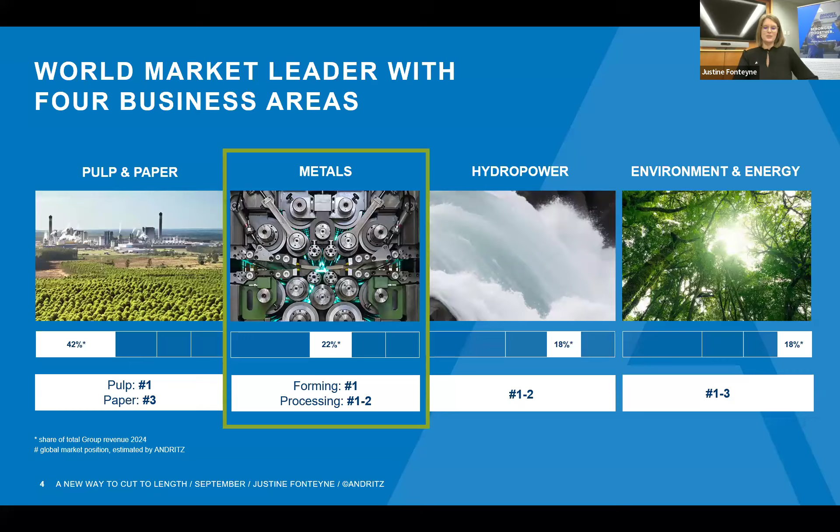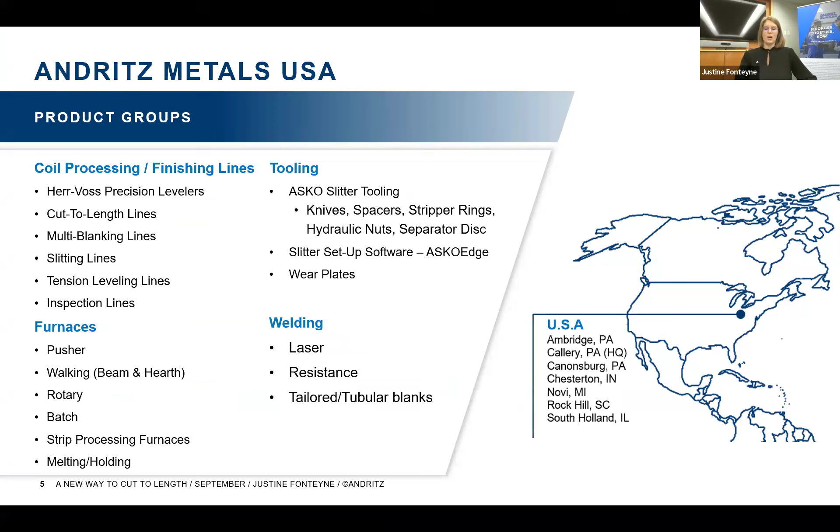So we are situated now in the ANDRITZ Metals division, and with Schuler, we are completing the US team of ANDRITZ Metals, which provides reliable services for coil processing, finishing lines, furnaces, tooling, welding, but also services like spare parts, customer service, and other services like reconditioning or training for several types of equipment.

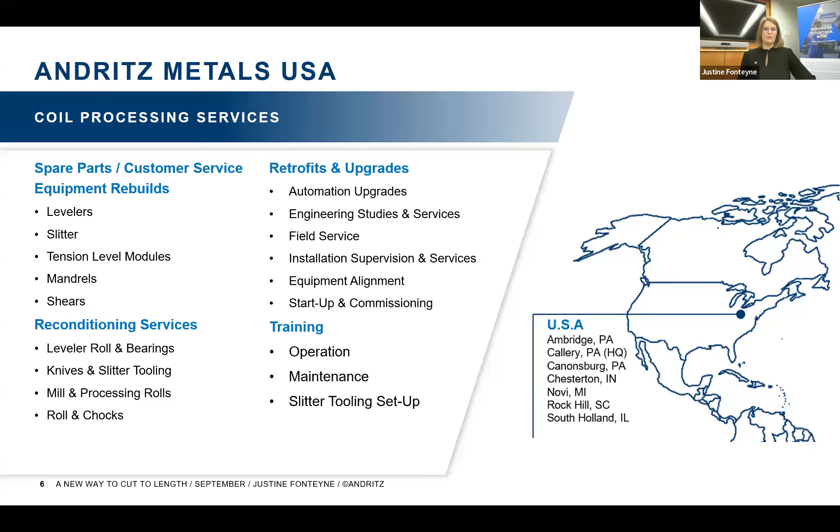By integrating Schuler, ANDRITZ now has the opportunity to provide equipment and solutions for the whole product cycle, starting from steel manufacturing up to the finished parts. And as ANDRITZ Schuler, we are more located in this end process. Today we are talking about the blanking technology.

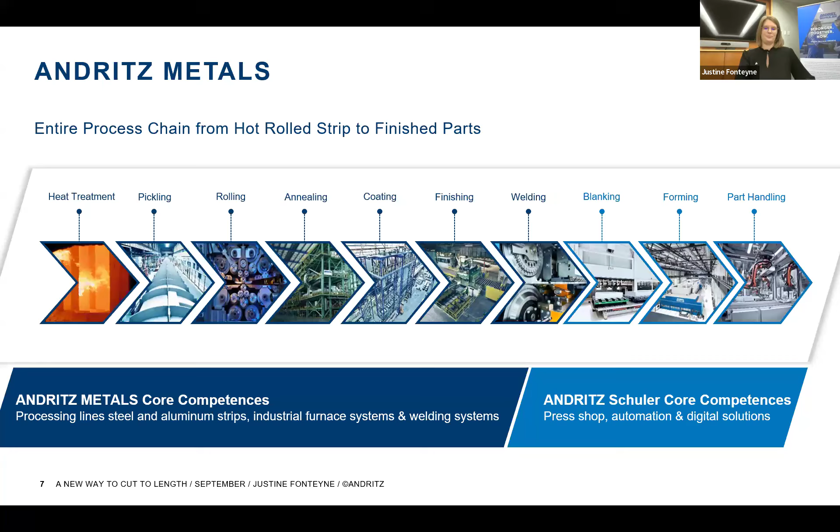ANDRITZ Schuler has more than 50 years of experience with laser technology, and with that heritage, we have the possibility to answer the demands of the market. In the last years, we saw an increasing rise of variants, smaller batches, smaller product cycles of vehicles, and also a trend towards lightweight construction, which brings various materials into the game, and also a lot of product-specific parts.

To answer that request, we developed a high-performance laser blanking line a couple of years ago that is not only producing high performance, comparable to a conventional blanking line, but also completely die-free. So everything related to dies can be eliminated, and also product-specific tooling can be eliminated so that product changes can be much faster, and therefore you achieve much more productivity of your actual line.

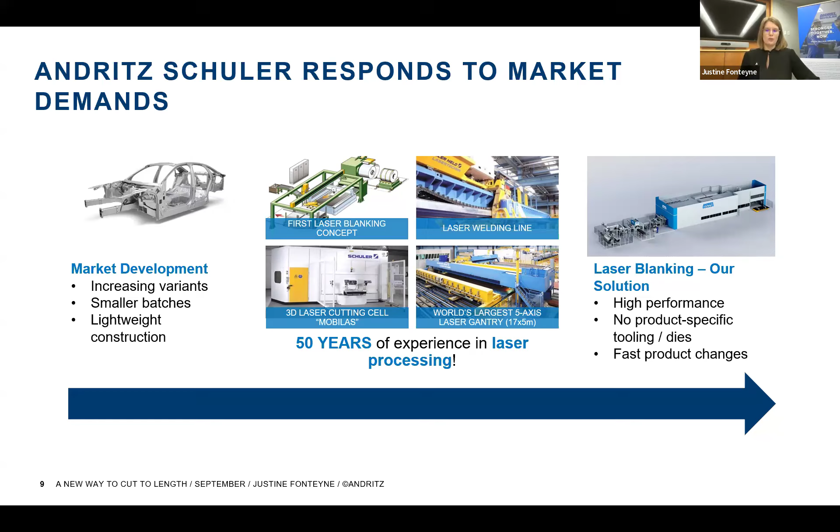And now we jump right into the topic. Schuler, or ANDRITZ Schuler, is coming from a blanking heritage, so we have years of experience with outer body panels mainly, and that's also where we started with our laser blanking developments. The first laser blanking lines were introduced as an alternative to blanking lines with press, and they are really dedicated to exposed materials and also very sensitive materials like aluminum, for example.

Today, I would like to talk about the LBL 1.18 DFT. This technology is dedicated to cut-to-length lines, or as an alternative to cut-to-length, but also for small batches of structural parts, including a high accuracy package to cover also the high accuracies, for example, for hot forming.

This line is also capable of processing thicker materials up to 6 millimeters, and is suitable mainly for unexposed parts, but also for exposed parts.

Before we go deeper into that topic, I'd like to mention our LBL 1.18 stop-to-cut solution. Whenever we face limits with our DynamicFlow technology, for example in terms of very high accuracies, this would be a nice option. It's also designed for smaller batches and can handle material thicknesses up to 12 millimeters. The key is that we design our lines dedicated to the parts you want to process, and come up with the best solution for your business.

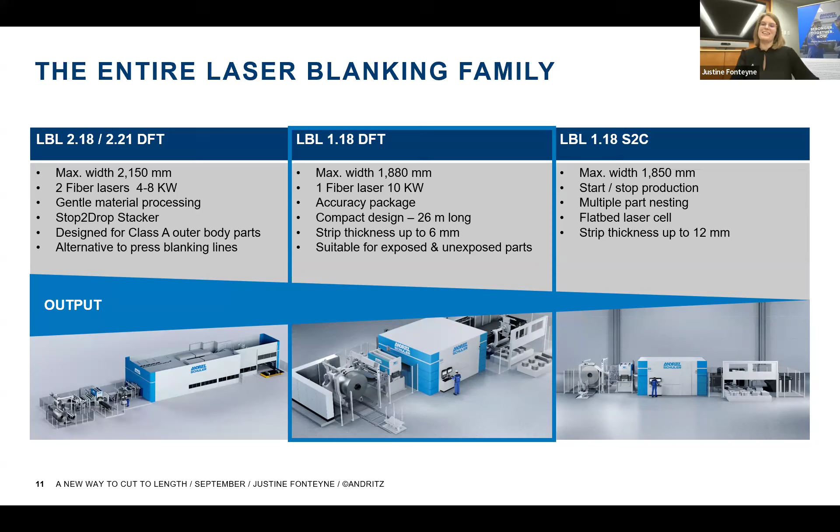Let's jump into the new way to cut to length. The 1.18 LBL DFT is not only a reduced version of the 2 laser head system, even though it comes with 1 laser. Our concept is to replace the shear with the laser.

That way you're able to do not only cross cuts like straight cuts or trapezoids, but also intelligent cross cuts like an S shape, or even unique shapes, as you can see here on the picture. You also see some cutouts, which is also a possibility you can add to your process, and that's a big plus compared to a conventional shear line.

The geometries can be flexibly adapted so that you can increase your material utilization. I have a couple of really good examples for that later for you.

For now, I'd like to show you that this line is a very compact solution in terms of space. It's about 50% smaller than conventional cut-to-length lines or conventional press blanking lines, and it runs completely continuously. So we do not need any loop pit or other big civil work for the installation.

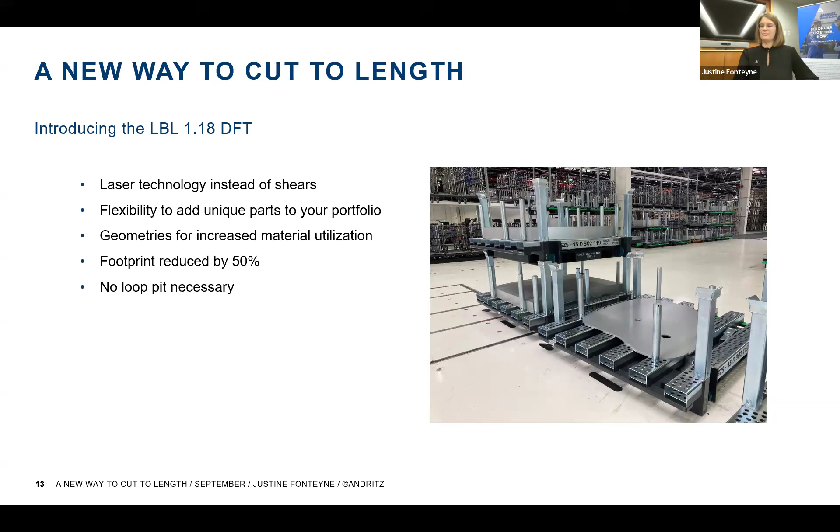Talking about the overall layout: as a normal cut-to-length line, it also comes with an uncoiler, a cutting area, and a stacking area. But what's very specific here is that we take the coil and go directly into the leveler. There's no in-feed unit in between.

Then we use the leveler to go into the laser cell, so that way we can reduce not only the loop equipment, but also the feeder technology. Our levelers are cassette designs, meaning you can use different types of cassettes for specific materials.

For example, for aluminum or steel, but also different thicknesses. If you have thinner material, you can use a different cassette than with thicker materials. With this cassette system, you have flexibility, and we can also add an automated cassette exchanger so that you don't need to do all of this manually.

Once the material goes through the leveler, it's pushed into the laser cell. Here we're cutting with one laser head in dynamic flow, meaning we won't stop the line. The material flows constantly at the same speed through the line.

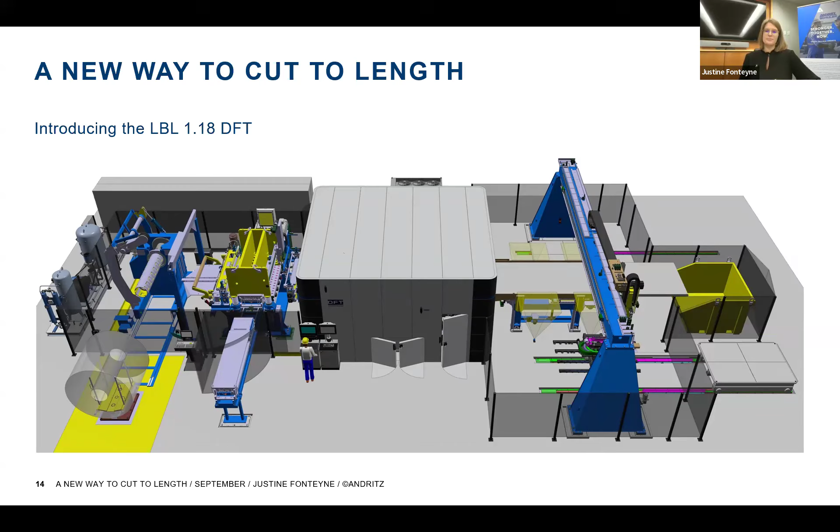And this is how it looks in production. You can see here the belts moving the strip material forward in a continuous way. You see the laser gantry with the laser head moving back and forth to cut the geometries.

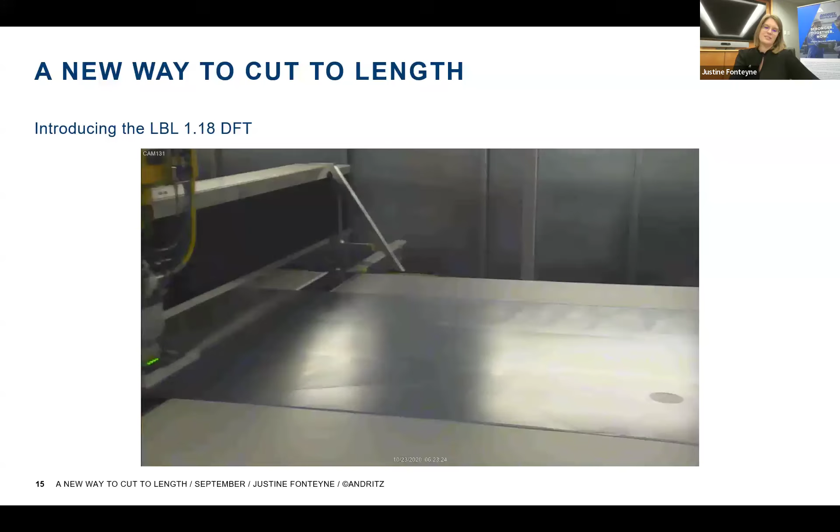Underneath, you can see that we are using shafts to make a little gap for the laser cutting, but also we are able to open those shafts to eliminate smaller scrap parts directly in the laser cell. This ensures a reliable process without having the risk of little small parts jumping around or getting stuck underneath or something like this.

What I also wanted to show is that we have a very closed design, so that means we do not have laser dust all over the place. We have dust exhaustion, a fume system where all the dust is collected and filtered so that there's no harm for people and equipment.

Our laser blanking line runs in dynamic flow, so that is what we tag the continuous cutting. Our line can be equipped with a 4-high leveler or a high precision leveler with 6 levels with support rolls.

We can integrate up to 10 kilowatt lasers, so depending on the thickness of your material, we define which one makes the most sense, starting at 4. And as I mentioned before, we have either the feeder as a single solution, or we add another one to make it a double feeder.

We can cover coils with a maximum width of 74 inches, and the maximum thickness would be 0.23 inches.

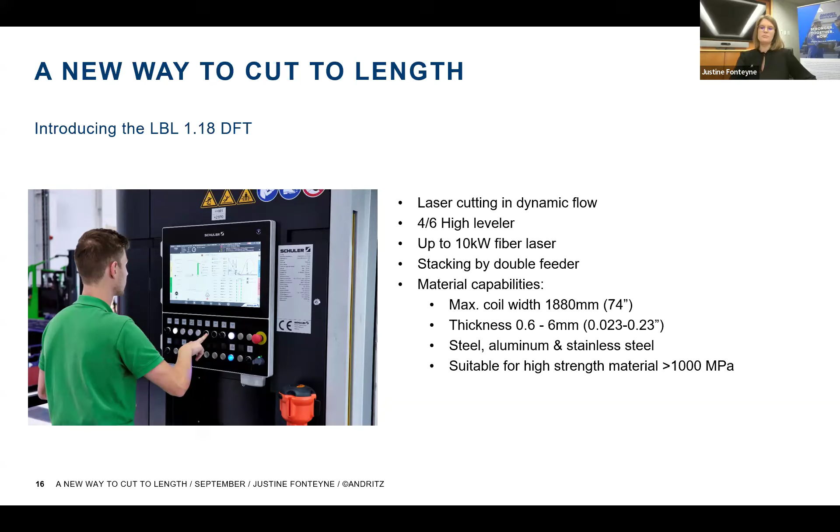With our systems, we are able to cut up to 45 parts per minute. So we are talking about cross cuts here, and also parts that can be stacked with 2 parts at a time with a double feeder.

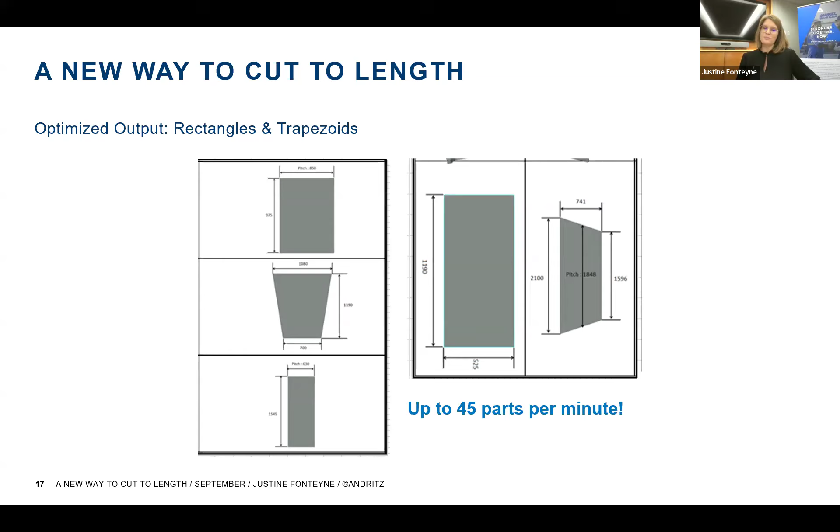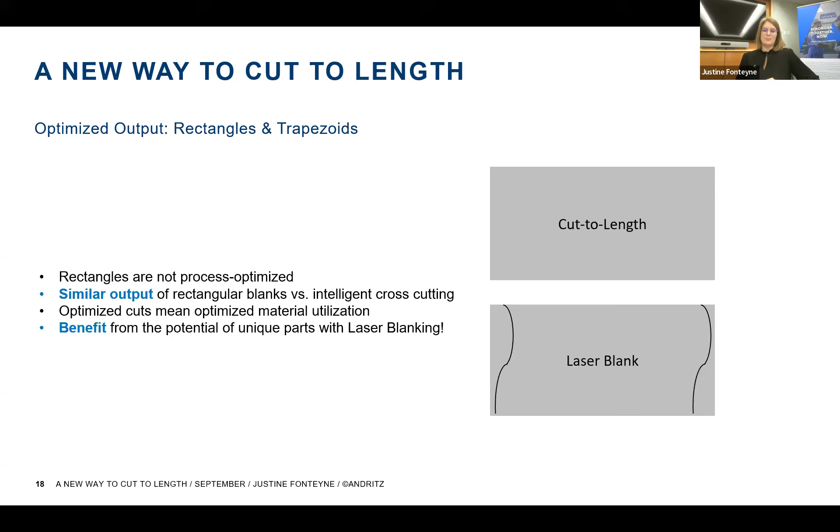But most of the time, the rectangular blanks are not really the blanks you want to have, but they're easy to get. And what we are promoting here with our intelligent cross cutting is that you're getting closer to the actual shape you would like to have, save material, and use the same output. I have some examples here to get you a bit into the topic.

So here you can see an example for straight cuts or trapezoids that would normally be run on a cut to length line directly from the coil. The first one is the hood. You can imagine cutting out a hood out of a rectangular blank where you would have the yellow areas as scrap. What we propose now with our laser blanking solution is that you can modify the straight cut into an omega shaped cut so that you can do an edge to edge nesting of the actual blank you want, this hood, and save 13% of material.

Those of you that are familiar with oscillating shears already know that you can get much more material savings from the oscillating movement. But here, looking at the second example with the fender, you see that you can save even more if we are talking about an S shape, also cut edge to edge, so that you can use the yellow areas that would be scrap if you used trapezoids instead of this intelligent blank.

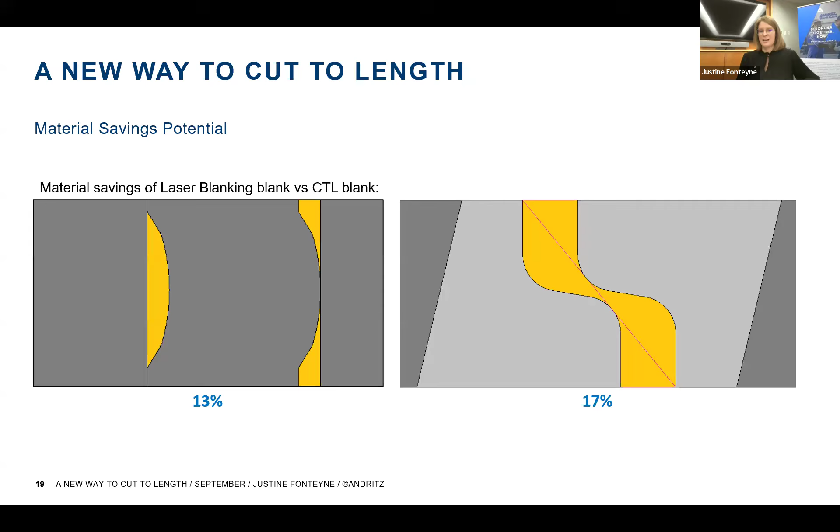Another example would be intelligent master blanks. We regularly see that rectangular blanks are used in flatbed laser processes afterwards to cut the actual part. What we have here as an example is that you are not using the full rectangular blank, but a multiple nesting of the parts you want to get and make an intelligent crosscut here. That means you would not have a rectangular blank, but this gray area as a new blank to introduce to your flatbed laser. Then you could, same with the rectangular blank, cut out 4 of those parts, but you can also use the corners for the previous intelligent blank or the next. So you could save 12% of material.

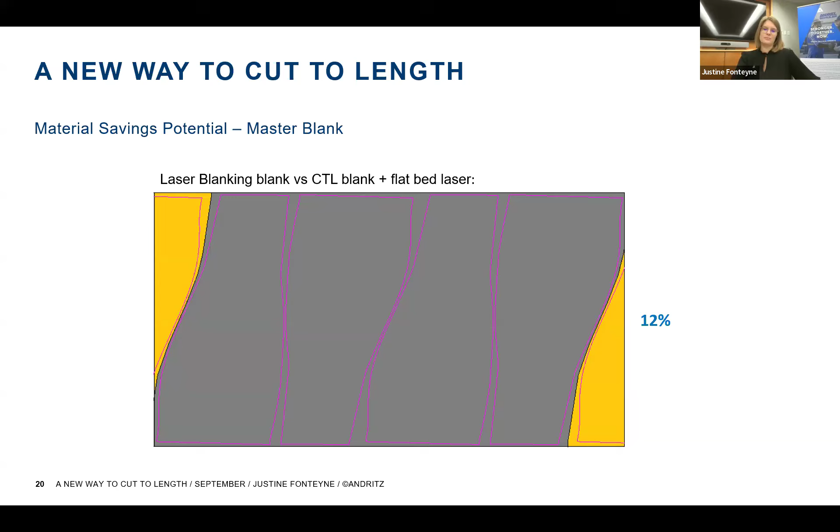And what comes on top with that solution is that we can use a second laser head on our gantry to make it a 2 laser head system.

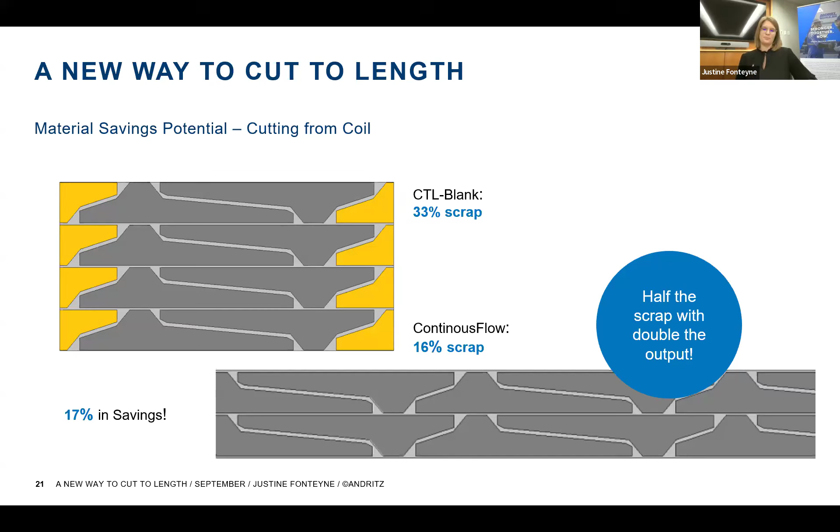Talking about output, I already mentioned that we can achieve 45 parts per minute. This is based on one laser head, and this is also our standard. The 45 parts per minute are valid for smaller feed lengths, where the feeder can pick 2 at a time. Otherwise, the feeder limits the output at 22, as you can see on the very first examples. When the feed length or thickness gets higher, you see a little less output.

This solution enables us not only to do straight cuts or cross cuts, but also cuts in length. It might be interesting to cut smaller rectangular blanks from a bigger coil to avoid one slitting step, which could be useful for smaller batches, or if you want to use only one kind of coil variety.

The next example shows how you can include cutouts, but here you can see the output immediately drops to 15 because of that cutout. So it is possible to integrate them, but we always recommend having the cross cuts as the main jobs for your line and only adding parts with unique features or cutouts in the product mix on a smaller scale.

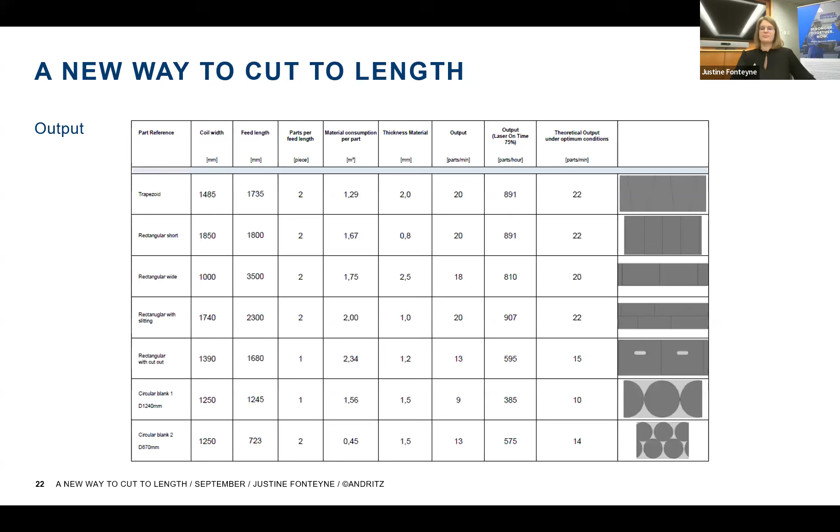The next point would be the footprint. I already mentioned that we are at approximately 50% of the actual size of a conventional cut-to-length line. Here you can also see that we save a lot of work in terms of the loop pit. In the picture below, you see a conventional cut-to-length line with a big loop pit to disconnect the continuous coil feeding from the start-stop motion of the shear, which would be the same for a conventional press blanking line.

At the end, you see some little holes for the lifting devices of the stacker, which can be eliminated with our feeder solution. On top, you see our laser blanking line 1.18 DFT, where there's only one little area in the foundation to actually lift the coil, but other than that, everything is mounted completely on floor. The full size is 26 meters in that standard version, while a full cut-to-length line would be 48 meters. So it's not really 50%, but we are very close to that.

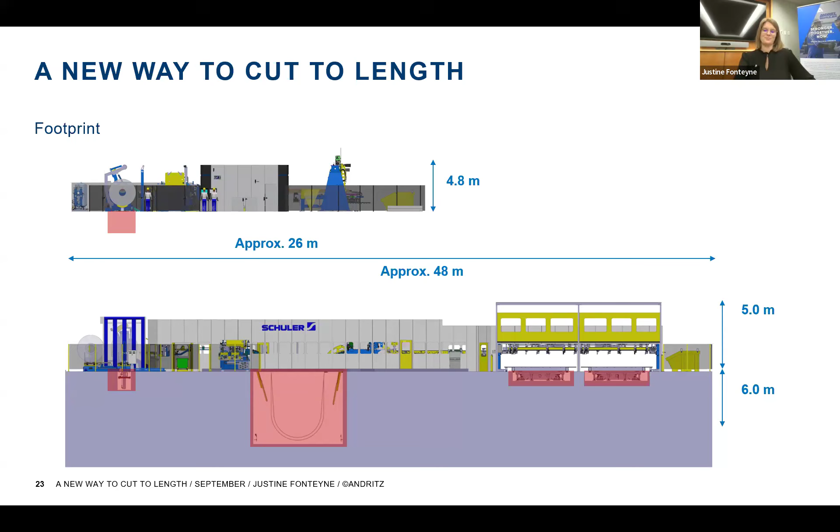And this is how it looks in real. On the left side, you can see the on-floor setup of the installation. We just have those foundation plates. In this special case, we also have connections to a scrap conveyor system, which is the little fences in the back.

Other than that, we also need very little trenches, as everything is mounted on platforms, as you can see in the second picture. We basically just have the in-feed point from the customer, and then one trench in the floor going into our platforms, and from there everything is distributed into the line. All the cabling and piping is also on floor in those pipelines, in these platforms.

You can see also that we use the cabinets as fences. We really thought about making this the most compact possible design to fit into even the smallest corner of your facility. All of our lines are pre-assembled, so we do a pre-assembly in our facility first to make sure everything is up and running, then we have a pre-acceptance test by our customer before shipping, and then we do the installation and commissioning on site.

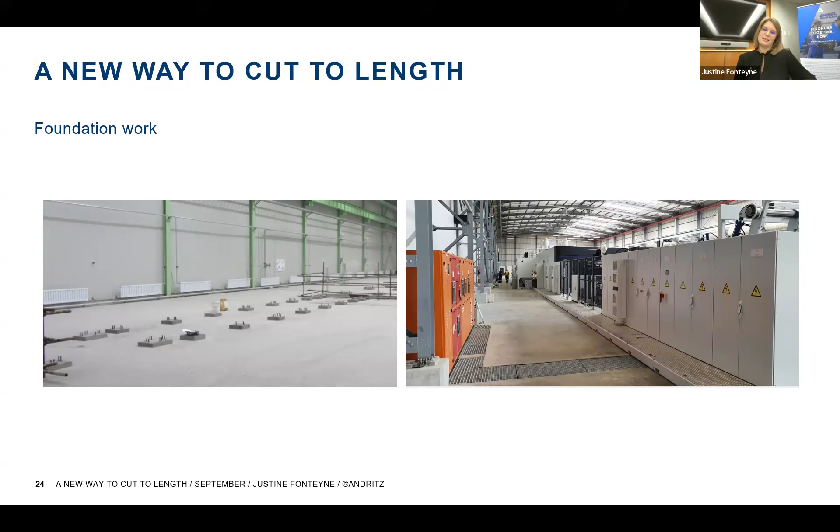To end the technology portion, I would like to highlight two options. The first would be the Class A package, which comes with an additional in-feed unit with cropping shear and also brush cleaning devices for the belts and the blanks.

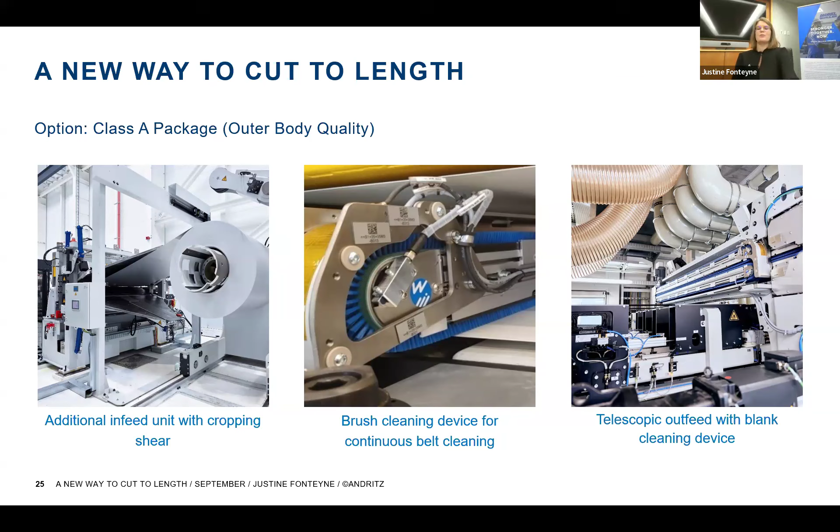The second option I'd like to highlight is part marking. This is done with a separate laser installed in our laser cell, but it is not linked to the cutting process. It's an extra laser doing the marking so that you have traceability of your parts, and in the long term, if you're interested, you can also add this to a track and trace system.

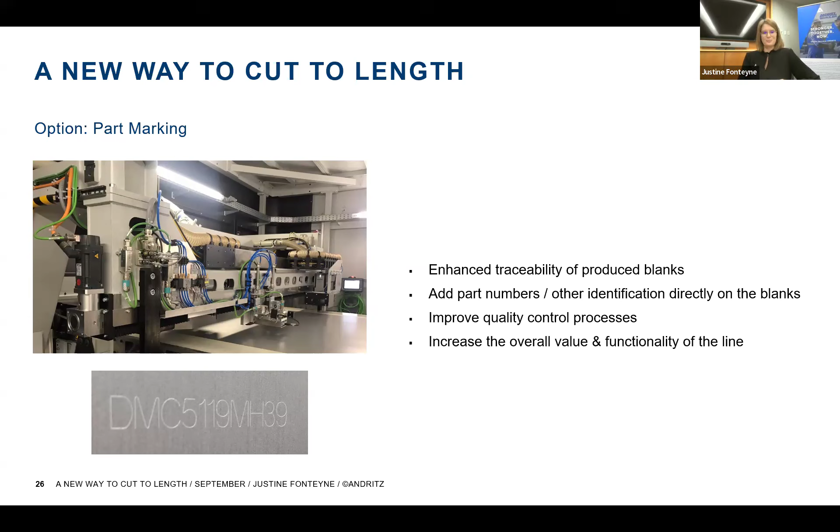So to summarize, the LBL 1.18 DFT is a compact entry into our laser blanking technology. It's a proven system, and we also have local service for that. In that kind of blanking line, we use the laser instead of shears or oscillating shears. This enables the customer to not only do cross cuts, but also any kind of shape, also with cutouts. That way you can increase your material utilization. We saw 3 examples with very high potentials, more than 10%. So it's definitely worth looking at.

I'm pointing that out so much because we have several customers that were already able to calculate their return on investment based on material savings. And then we have this compact design, which is a very big benefit in terms of floor space, and also that you do not need any foundation work like a loop pit - that's a big plus, as you can put the line pretty much anywhere. So we have customers that are using former coil storage places, for example, or second floors.

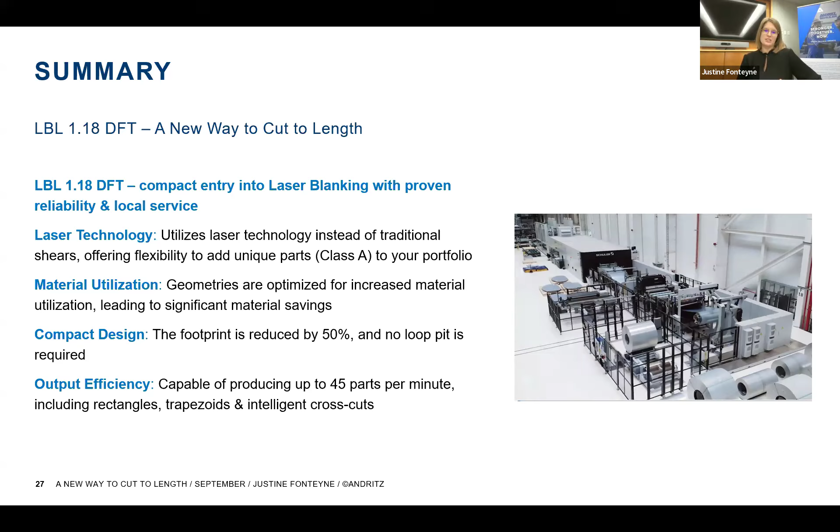Support service: we have several lines installed in North America, and therefore we established also a very powerful service infrastructure with several facilities in North America - Canada, US, and also Mexico. This team can support with launch assistance, troubleshooting right away, spare parts, and they are backed up by our product specialists from Germany that have always remote access also to your lines.

On top of that, we are dedicating always a local project manager during the installation phase. So that means you have always one point of contact in your time zone that is taking care of all your issues or requests. We also know from a couple of our customers that are cooperating on backup solutions with their laser blanking line solutions. So if you choose to go with laser blanking, you're definitely not alone. We are there to make a smooth transition towards laser blanking.

References: we have 24 laser blanking lines sold worldwide so far. It all started in 2012 with our first prototype. And since 2014, we are providing equipment for a big OEM that is using them for serial production of their cars as well.

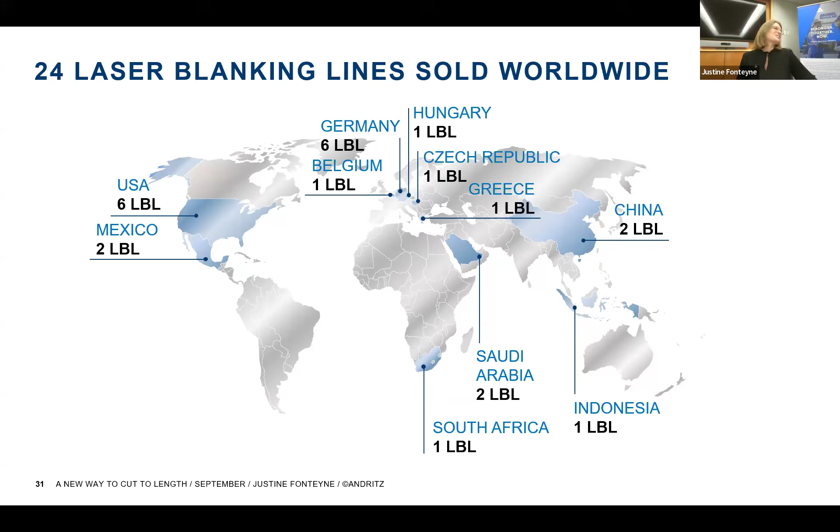At this point, I'm very happy to introduce our guest, Christopher Christock, Technology Director at BWD Technologies. Chris has 34 years of steelmaking, finishing, and coating experience, and 11 years of metal processing experience, including laser applications. BWD Technologies runs the first laser blanking line in the US and is currently setting up the second one. So we are very happy to have you here, Chris. Welcome, and looking forward to your insights of operating laser blanking lines.

Well, thank you, Justine, for that introduction. I want to say that BWD Technologies is honored to participate in this webinar by providing a summary of actual experience with the laser blanking equipment provided by ANDRITZ Schuler and our laser blanking process that it enables.

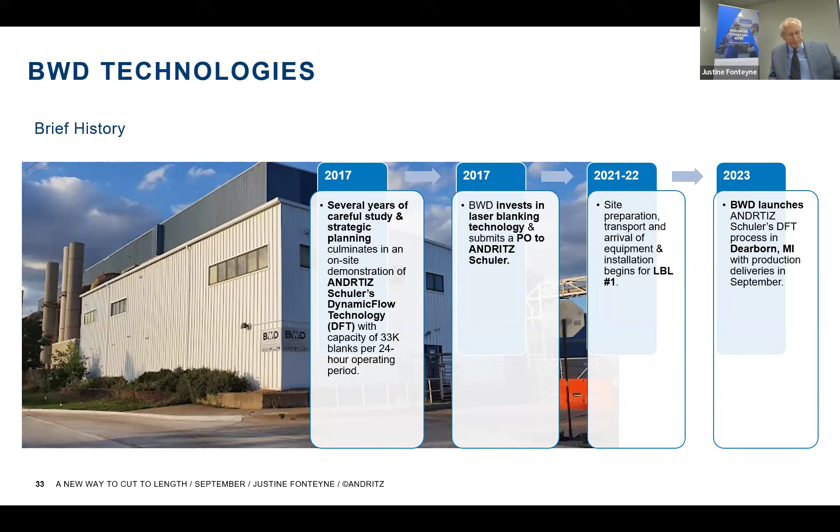It's difficult to pinpoint the single most important factor establishing the need for laser blanking, but I believe the significant market change brought about by the drive to implement electric vehicles was a major factor, as the data shows a significant increase in rate of startup automotive companies and commensurate increase in new model launch plans correlating to EV manufacturing. These new startup manufacturing facilities were geographically located in new regions, and each held a market share that created intense focus on cost savings and flexibility of the manufacturing process.

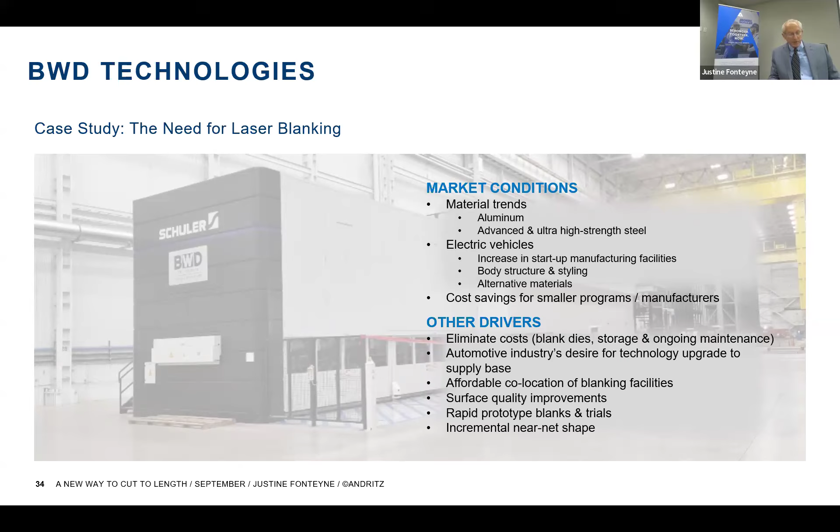This exposed capital inefficiencies associated with mechanical blanking, namely the expense of blanking dies and complex facility requirements such as overhead cranes, significant foundation work, and storage space. There was also an ongoing requirement for press and die maintenance to consider in a supply chain, which increased manufacturing cost pressure for these lower volume niche vehicles as EVs were being marketed.

ANDRITZ Schuler's DFT equipment and BWD technology mitigated these cost concerns with a robust laser blanking line that is capable of high volume laser cut blank production.

Other drivers of the need for laser blanking include the affordable co-location of blanking facilities near automotive manufacturing facilities, the freedom from press tonnage requirements to blank newer high-strength materials, the flexibility and capability for rapid production of prototype trial blanks, and the ability to incrementally modify blank shape design to achieve best-in-class stamping quality and to produce near net shape blanks where costly trimming after forming could then be minimized or eliminated altogether.

Laser blanking has benefits for both the producer or the blanking operation and the consumer or the stamping operation. While the footprint of the machine we purchase resembles that of a mechanical blanking line, the elimination of space requirements for dies, die maintenance shops, and storage space for press parts creates facility space for additional revenue-generating activities.

The DFT laser blanking equipment requires much less maintenance than either mechanical blanking or older technologies for laser metal cutting and blanking. It has, by virtue of its continuous coil feeding and integrated controls for laser motion, a much higher productivity rate than individual sheet-fed laser cutting machines.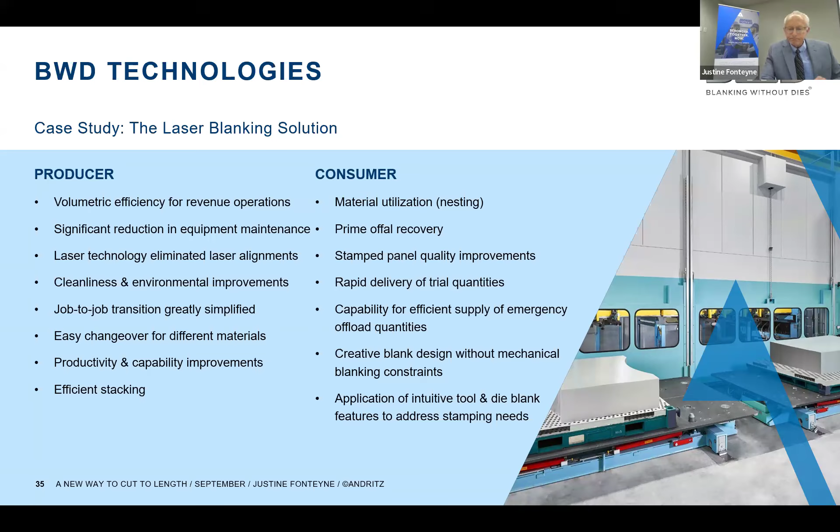BWD continues to receive positive feedback from our customers about the quality of our products supplied using the laser-based DFT process. Customers appreciate our responsiveness to inquiries and are able to utilize the flexibility of laser blanking to achieve cost and quality benefits, as well as speed to market ability.

Our blank and blank stack quality is best in class. The use of full width rubber coated belts for conveyance in the laser house leading up to the stacker has all but eliminated surface defects such as dents, pits, and scratches associated with mechanical blanking.

The clean cuts afforded by the laser, with optimized laser cutting parameters, along with continuous surface brushing of both the belts and the blanks in the DFT process, results in the elimination of draw die dirt contamination resulting from mechanical blank burrs and slivers.

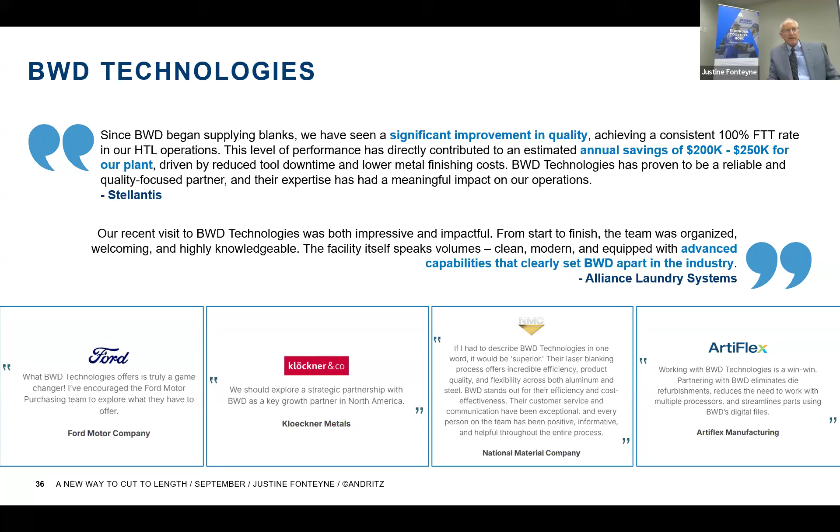The quality, cost reduction opportunities, and flexibility afforded by the use of ANDRITZ Schuler's DFT blanking process is part of BWD Technology's short and long-term business plan.

Concurrently, the process for an additional third BWD line with our JV partner in Querétaro, Mexico, has begun, and we will begin supplying customers in May of next year.

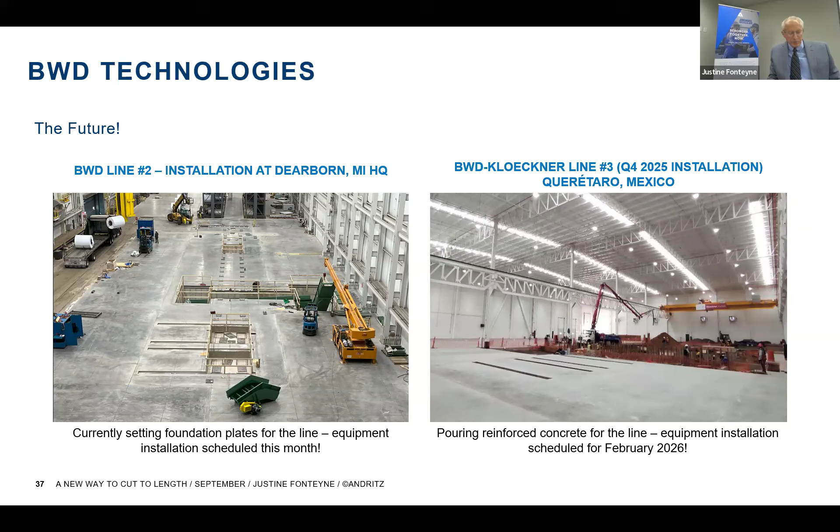Both of these lines add to the laser blanking production capacity for BWD using ANDRITZ Schuler's equipment. Our long-term plan, as the laser blanking process moves along the adoption curve, includes a vision for a network of laser blanking machines that are co-located in existing and developing automotive manufacturing regions.

This is possible because of the lack of heavy machinery involved in the DFT process, which enables the use of existing sites for implementation or requires lower capital investment for new facilities to house the equipment and execute the process.

We are also involved in working with our customers to leverage the relatively unconstrained blank design features of the BWD DFT process for improvements in material utilization that you heard Justine speak about.

Our work in laser blanks also generates improvements in the quality of existing stamped panels, as documented by our customer feedback. In summary, we equate successful implementation of laser blanking processes executed using the ANDRITZ Schuler machine as the observable transition of customer supplied blank designs to those that not only improve stamped panel quality, but also support high productivity in the laser blanking process.

Thanks, Justine. Oh, thank you very much for that insight.